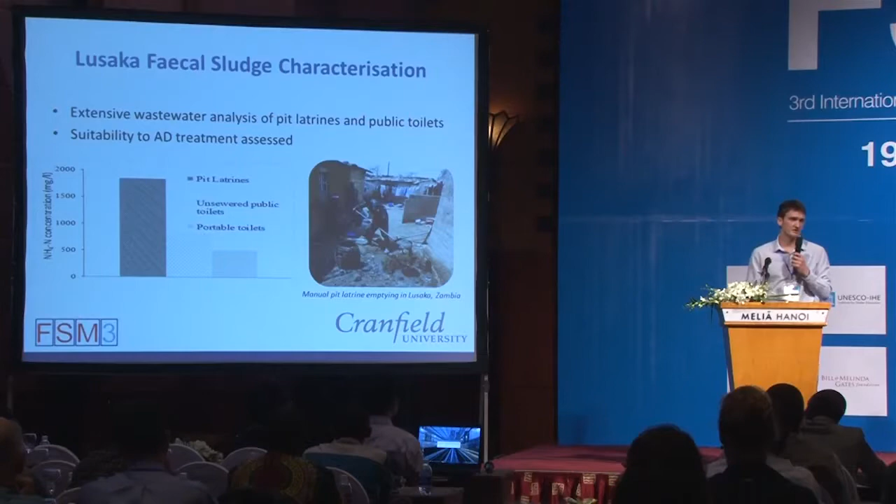This developed with the aim of coming up with a simple way of recovering ammonia and nitrogen from anaerobic digestion effluent, and in turn creating high-value products that we can use.

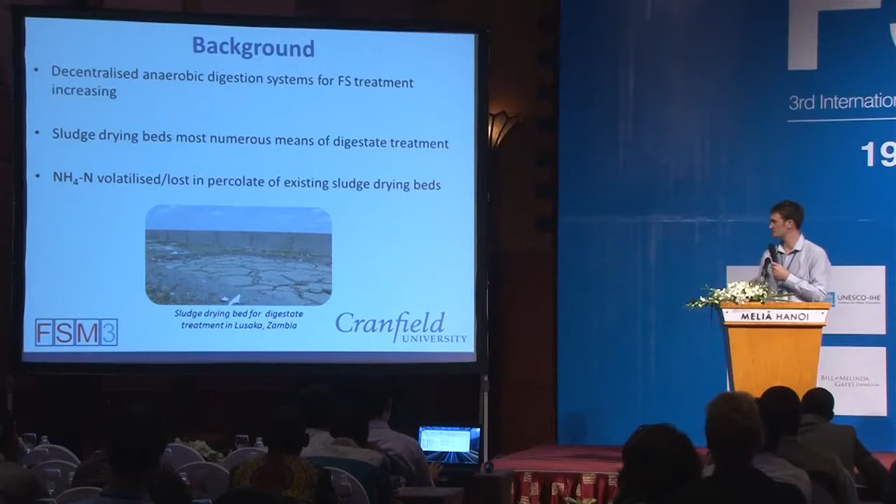Much of the nitrogen is volatilized and lost to the atmosphere, or lost in the percolate below the sludge drying bed. So the end product means the sludge in the drying bed is actually quite low in nitrogen. If we're going to use it as a soil amendment, it doesn't have much nitrogen there, and it's really just an organic material.

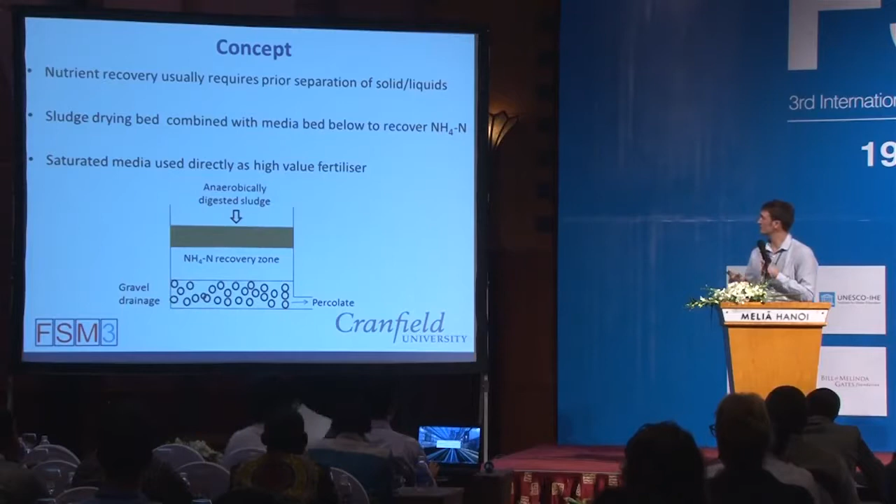This led to the concept that we could combine sludge drying beds with ammonia recovery for real benefit. Most ammonia recovery technologies generally require prior solid-liquid separation to get ammonia recovery. But what we thought is, if we could use a media layer beneath the drying bed surface to absorb and capture the ammonia, then we could use this media in fertilizer. That's the concept, and we set out to find a media that could fit this purpose.

We first looked at clinoptilolite, which is a naturally occurring zeolite. It's got a high affinity for the ammonium ion, which is perfect, but it's also got great potential as a slow-release fertilizer.

The second medium we looked at was biochar. Again, it's fairly available in these sorts of countries, perhaps a bit expensive, but it's also got very high porosity and a large surface area on the particles, quite similar to activated carbon.

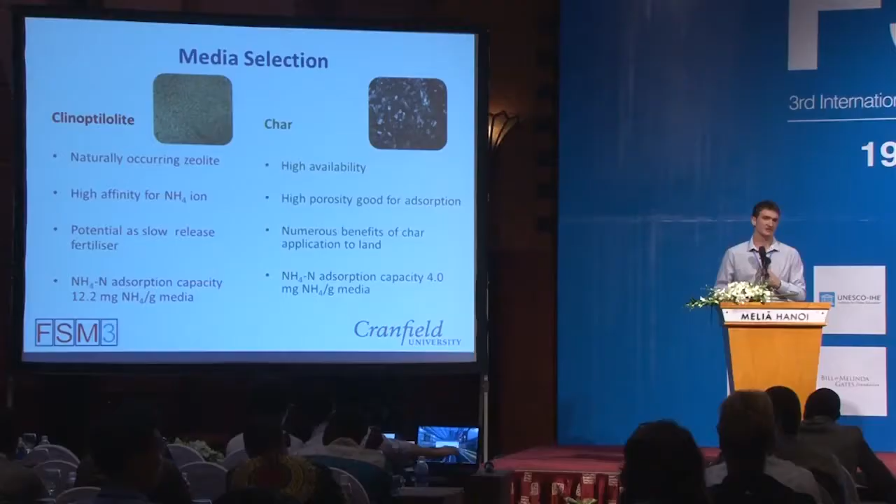Both of these are great for applying directly to land, so we can use the saturated product directly as fertilizer. As you can see, we did the batch absorption isotherm test, and we found that zeolite is the clear winner in terms of its capacity for absorbing ammonia at these ammonia concentrations.

I'm just going to focus now on zeolite. Zeolite has been used as an ion exchange media frequently in the literature for conventional sewage works in Europe, for example. However, generally it's used for treating final effluent and as a polishing stage, not for treating waste with such high concentrations of ammonia as we see in this effluent.

Not only this, but there are high concentrations of competing cations in the solution, which interfere with the ion exchange process, and this could cause a reduction of capacity by 25%. But the high organic load seen in anaerobic effluent actually increased the affinity for ammonia absorption by 14%. So that was quite interesting.

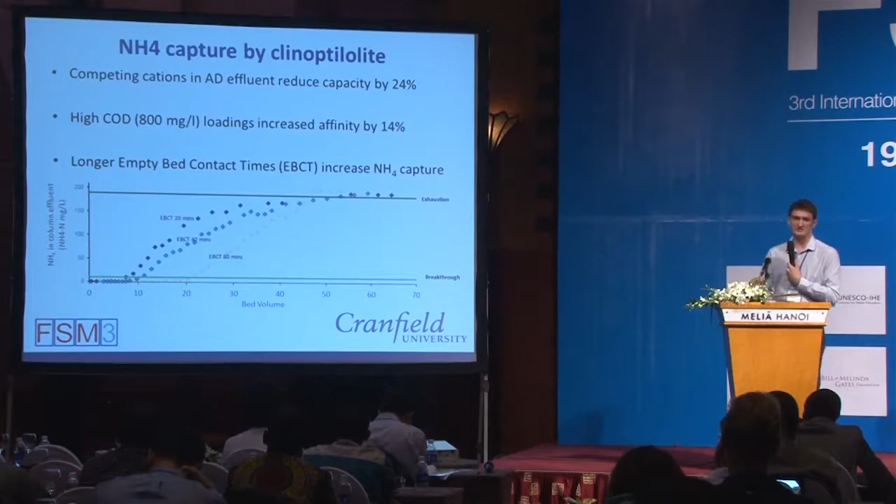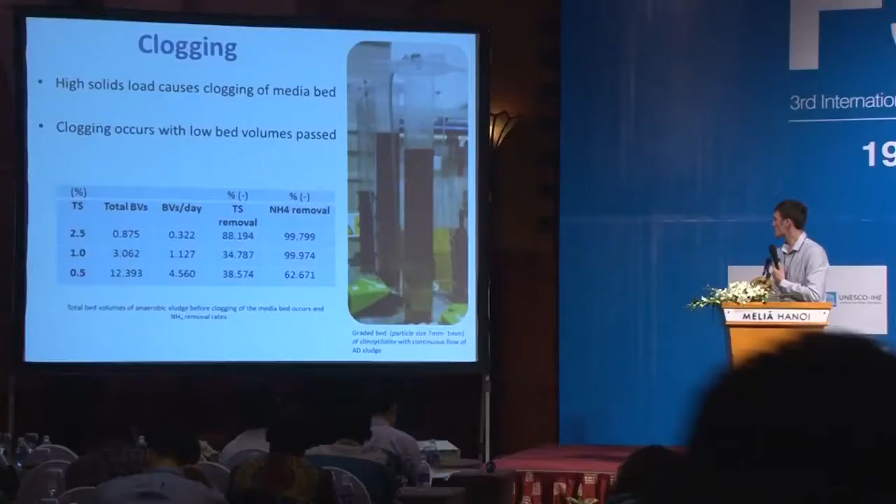However, that was with anaerobic liquor without the solids. We introduced the solids, and you get what you'd expect. And this is largely in terms of clogging.

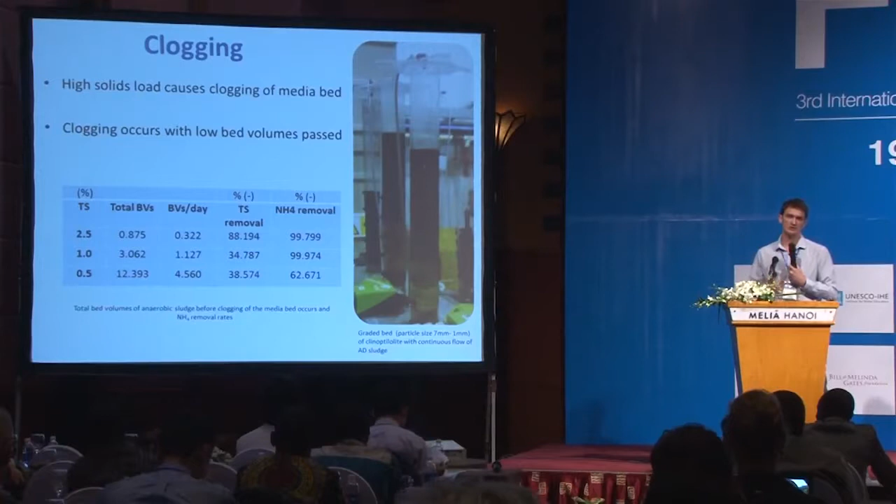We set up some large scale columns with trickling anaerobic effluent through the columns. But what we're seeing is clogging of the media bed at the surface, resulting in quite low volumes of sludge percolating through the media.

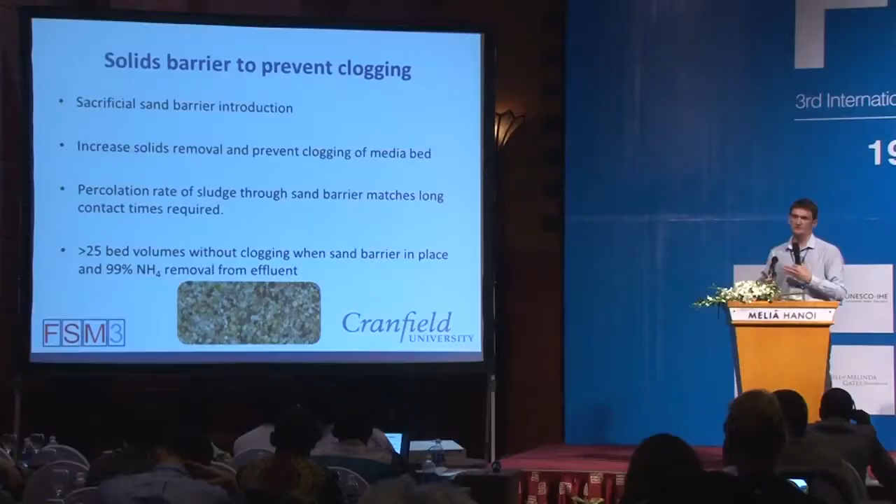But we had a solution for this in terms of introducing a sand barrier at the top. The idea of this sand barrier is to be sacrificial, so we can remove it as it gets clogged and preserve the media bed below. This works well, as most of the clogging was occurring at the top of the media bed. So the sand barrier captures most of the solids here, we scrape it off, but we're still getting very consistent results.

So just to conclude, the proposal for the new design is a system that is quite flexible. It can be batch fed, or continuously fed in a gradual trickle. What we're saying is that you just need to load it until the sand reaches the critical point of solid loading and no longer allows any percolation through the bed.

So this is quite flexible, and it also adapts to your area. All you've got to do is measure the rate of the critical point where the sand no longer percolates beneath the bed. And then after this, you simply scrape off the sludge thick cake at the top, and then reapply, and keep going in cycles like this.

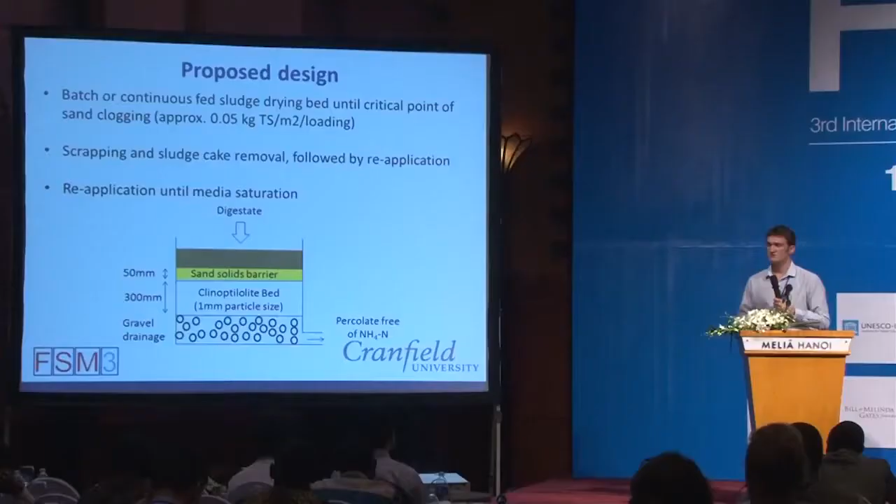And it allows a much higher rate system than conventional drying beds, and can be fitted into different areas. It's also great because it provides good flexibility in terms of making the bed deeper depending on the service times you want, so you can have this system run for years and years without changing the media bed. It's all about changing and adapting however you want it to suit the setup.

So just to conclude finally, this has got great potential for this sort of modified dry bed concept. It's got flexibility in terms of operations and maintenance, and provides great benefits in terms of protection of the environment, making it well suited for dry beds in general, just to start with.

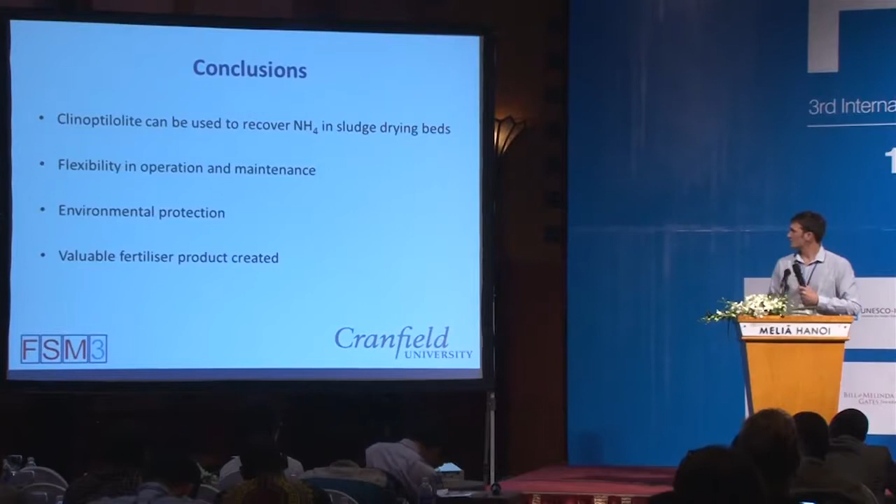And also, at the end, you're creating a product that is highly saturated with ammonia, a really high value fertilizer that can potentially be used. So thank you for your time, and I welcome any questions or comments.

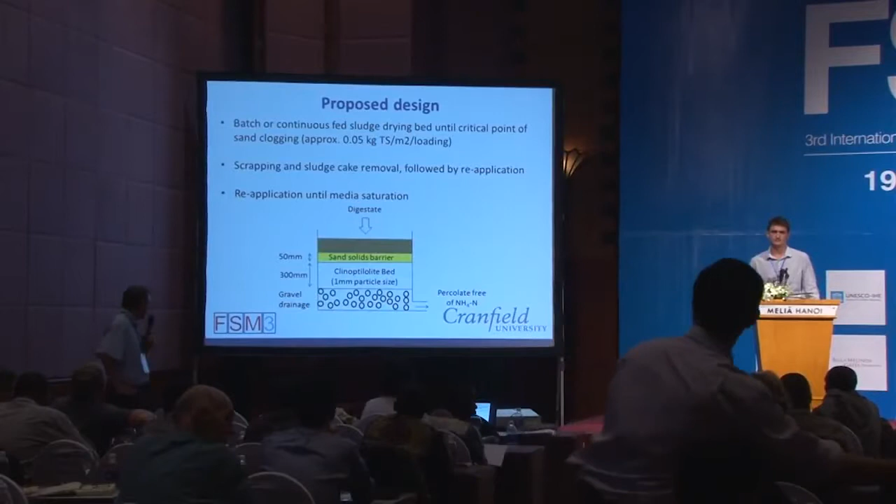Thank you. Oliver Wright from Mantu. The binding of the nitrogen into the media - have you done any testing on how well it's absorbed and bound onto the media? And to dilute it or leach it out, what would you use? I'm not a chemical engineer, but how would you release it from that? If it's very well bound, how's it going to work as a fertilizer or soil conditioner or something like that?

Yeah, that's a great question. You can regenerate the media and strip the ammonia off it just by sodium solution, but this is not really ideal, because to do that you've got to have a lot of chemicals and it just adds another process. In terms of how well it naturally releases the ammonia, that's a great question, and I think it requires quite long-term pot trials and studies to see whether that factor is the case, and that's definitely future work that would be needed.

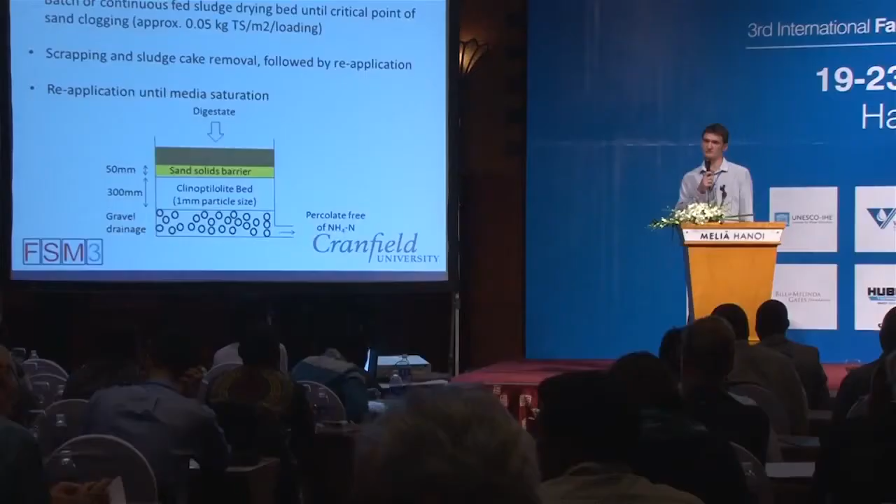There are better medias that we could use if we're thinking of regeneration, but clinoptilolite has a lot of advantages in terms of agricultural benefits as it is, so that's why it's selected as one of the medias. One of the reasons for not selecting the char to move forward was the char's got quite a good ability to absorb, but it tends to hold on to much of what it absorbs and doesn't actually release that well.

So that was another one of the big benefits of moving forward with clinoptilolite instead of the char. Sorry, so the second part actually was, because you were talking about a lifetime of the bed, maybe a year or 2 years before it would be exhausted, so that must mean quite a low application rate per volume of bed. Maybe something you can talk about afterwards, of how you get contact between the bed and the fluid at such a low rate, and the shape of the medium.

Yeah, I agree, I think there's a lot of adaptability in terms of the hydraulic rate, depending on your land availability. You can run it as quite an intense system on a small plot of land, or you could run it as quite a large, less intensive system. It would all be about sizing the rate and working on that.

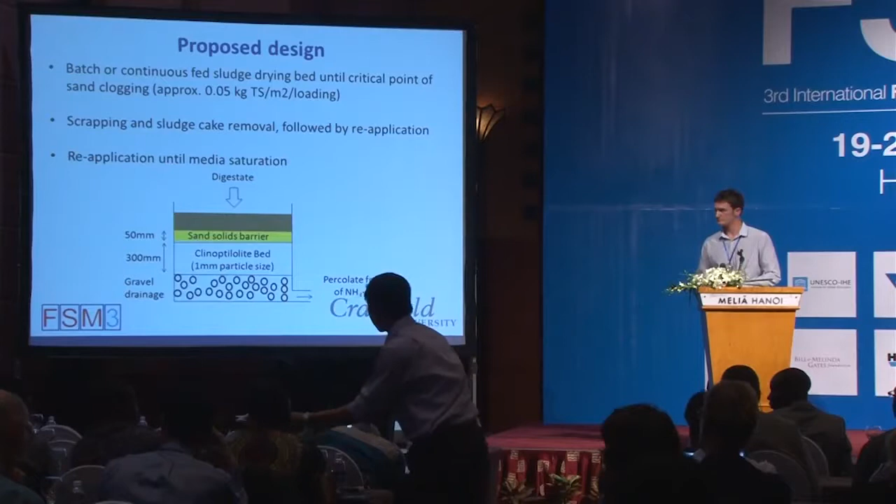Okay, my question is still on the ion exchange. Potassium ion and ammonium ion have almost similar ion sizes, and it was almost the same affinity for potassium ion. So did you do any quantification of potassium in your sludge?

Yeah, so we have been monitoring potassium. Were you asking about potassium in the incoming sludge? Yes, because it is almost similar, I mean, similar size with ammonium ion, and that was an almost similar affinity for potassium ion as well, so that ion exchange reaction is very important for you to consider.

Yeah, I touched upon some of the impacts of competing cations on the reduction in capacity for ammonia. Potassium is important, and the zeolite will capture potassium for the reason you say. We've done some work on the order in which the cations bind to the zeolite. Potassium generally outcompetes ammonia, so it will generally capture more potassium than ammonia, but that's not a bad thing in our eyes, since we're generally not seeing that high concentrations of potassium in anaerobic digestion effluents. There it is there, but we want to capture that as well, so I think it all adds to the benefit.

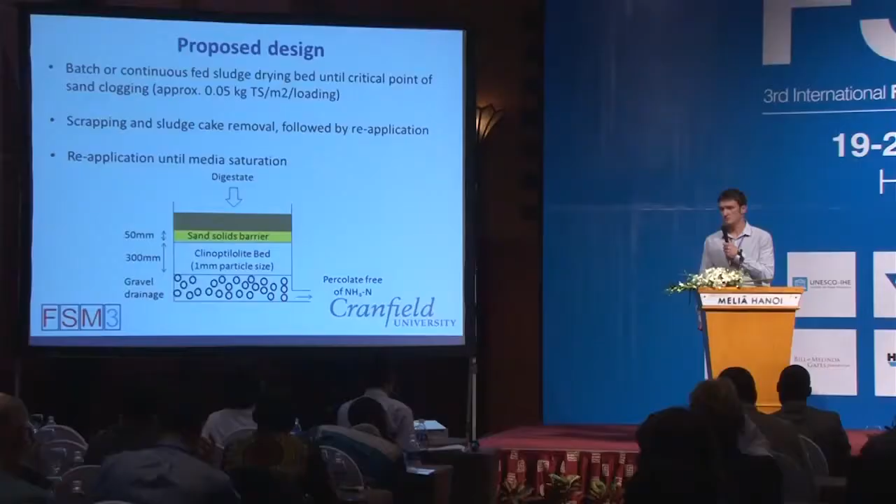I'm sure many of you, like me, have learned a new word today—clinoptilolite. Never heard that before. I'd be interested to know how available it is, and the cost and stuff like that. We can talk about that afterwards.

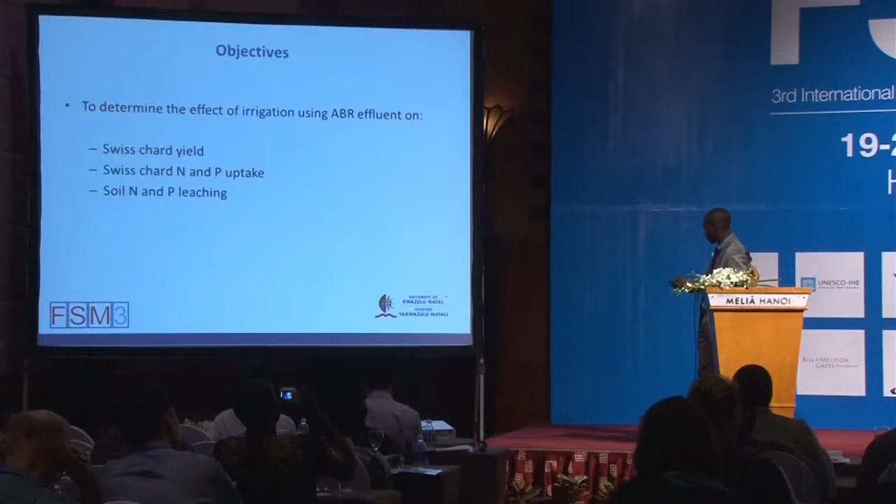Thank you very much. Good morning, ladies and gentlemen. My name is William Musazura from the University of KwaZulu-Natal. My major focus of study is trying to incorporate an agricultural component as part of the sanitation system. My research was entitled 'The Effect of Irrigation with Anaerobic Effluent on Swiss Chard Yield, Nutrient Uptake, and Leaching.'

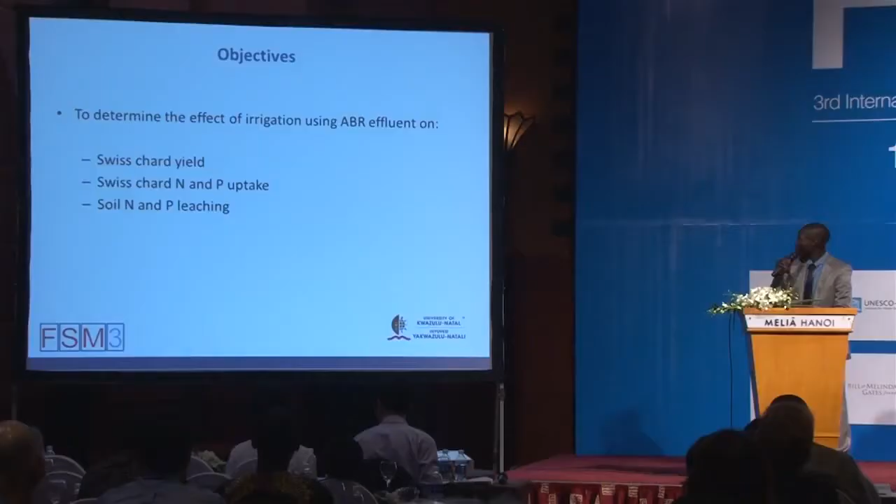Demographic studies have been characterized with high rates of urbanization, with about 70% of the population living in towns and cities. This figure is expected to rise by 2030 and beyond, according to the studies.

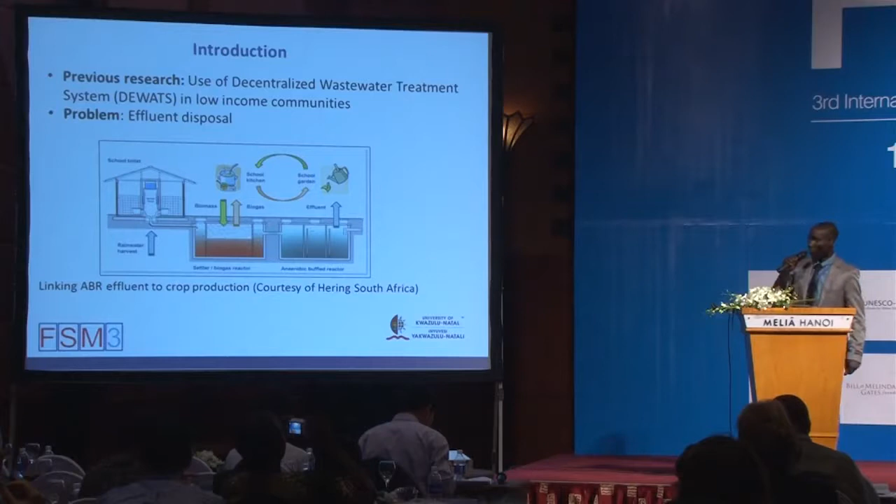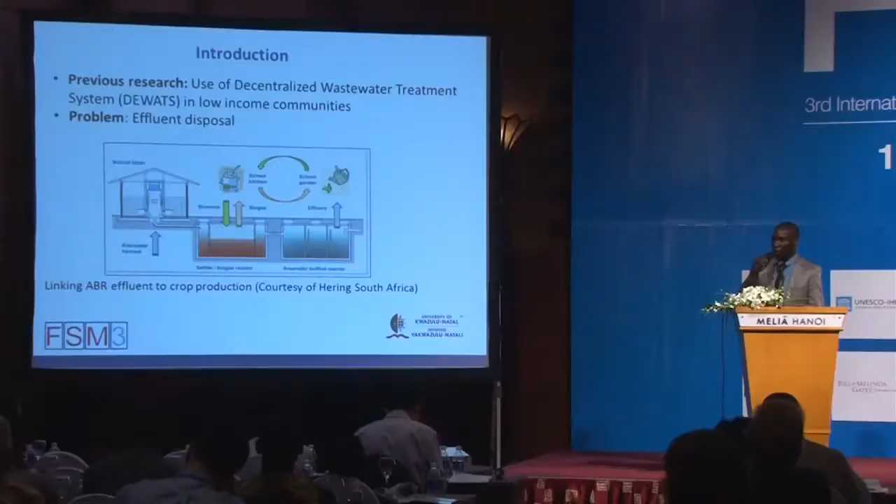This is also imposing pressure on local municipalities as they try to link sanitation systems to the ever-increasing informal settlements. However, decentralized wastewater treatment systems have been proposed as one of the best alternatives that can provide on-site sanitation to low-income communities in most developing countries.

So the problem is now first with the disposal of effluent. How can we dispose of the effluent? Should we dispose it into water bodies, considering that it contains high nutrients such as nitrogen and phosphorus? Disposing into water bodies can lead to eutrophication, so can we use it in agriculture instead? Its use in agriculture must also be sustainable. Won't it lead to other problems such as nutrient leaching?

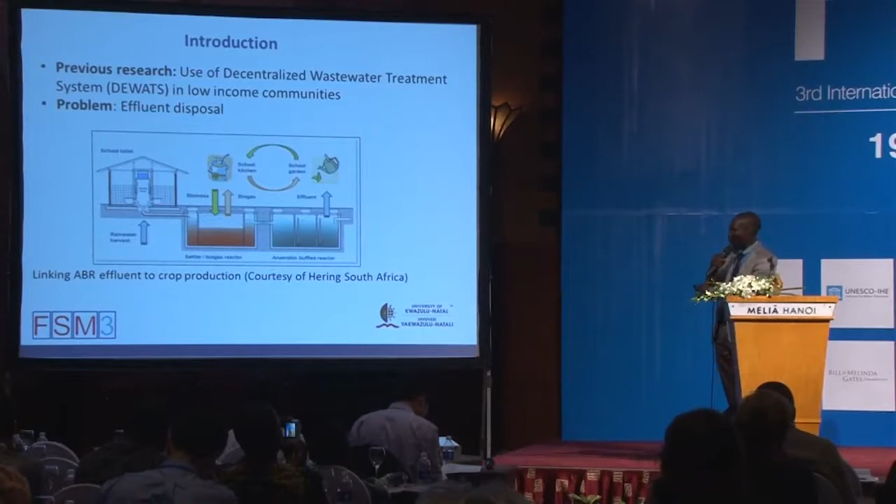That's where I come on board. My major objective of the study was to investigate the effect of the anaerobic baffled reactor effluent on Swiss chard yield, nitrogen and phosphorus uptake, as well as soil nitrogen and phosphorus leaching.

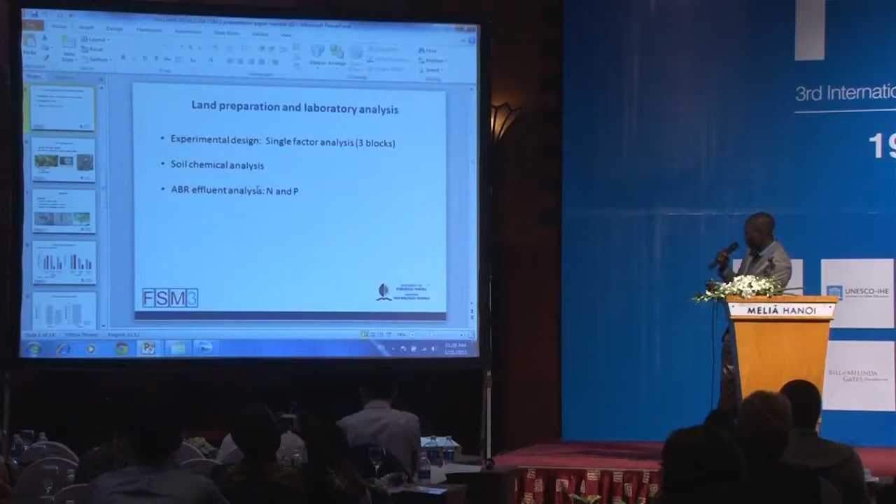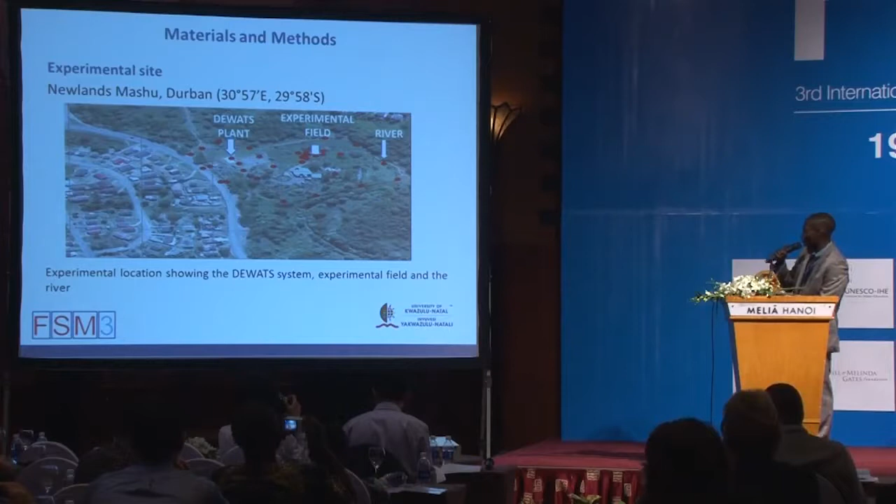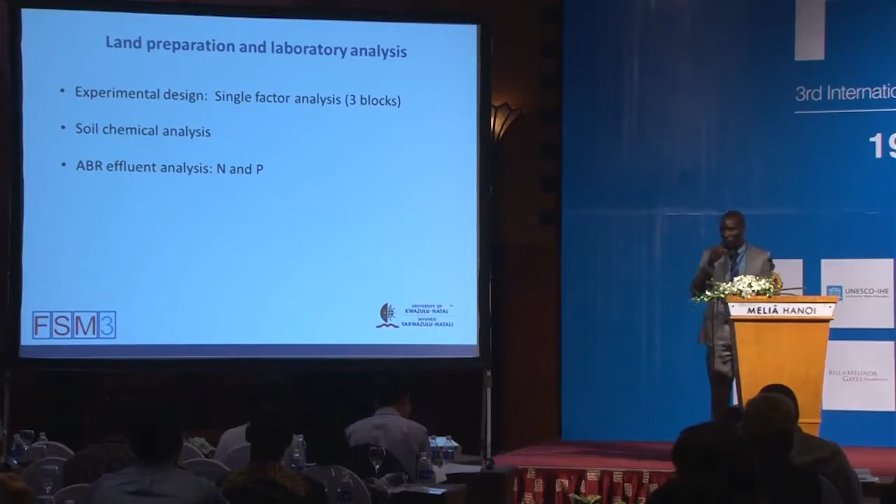My experiment was conducted as a single factor analysis with 3 blocks. Soil and chemical analysis were done before and after each experimental period. The ABR effluent which I used for my experiments was analyzed for physical and chemical properties, especially nitrogen and phosphorus.

My experimental trials were the ABR effluent irrigation without fertilizer, and tap water irrigation. My experimental treatments included ABR irrigation, tap water irrigation with fertilizer, and one treatment was left under rainfed conditions.

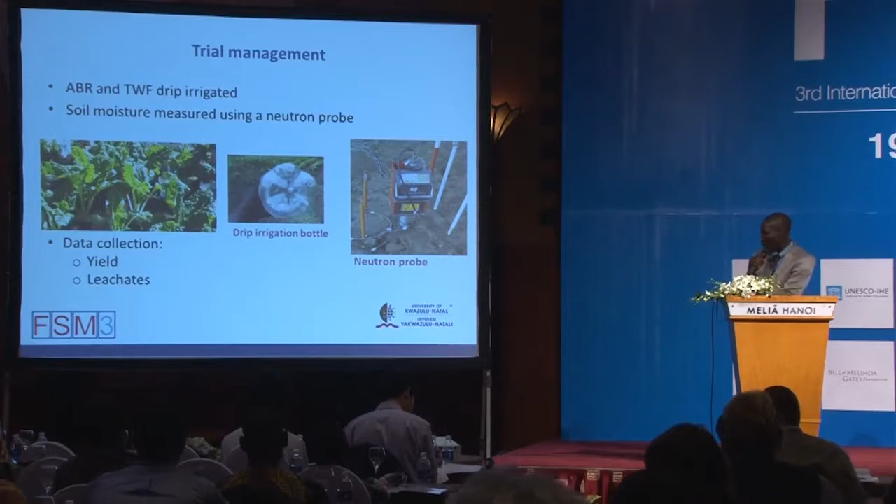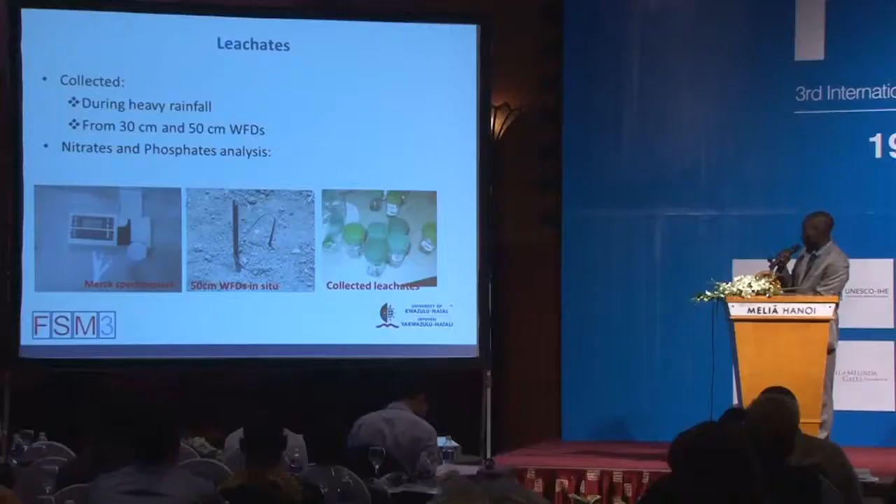The results which I obtained showed that irrigation with ABR effluent was comparable to other agricultural practices, such as tap water irrigation with fertilizer.

During the first season in summer 2012, there was no significant difference in fresh yield as well as dry yield. However, significant differences were noticed during the winter season, when the ABR effluent irrigation had the highest fresh yield compared to tap water and fertilizer, as well as under rainfed conditions.

These results were also consistent, although tap water irrigation was not significantly different from irrigation with ABR effluent in terms of dry mass. This could probably be due to seasonal differences.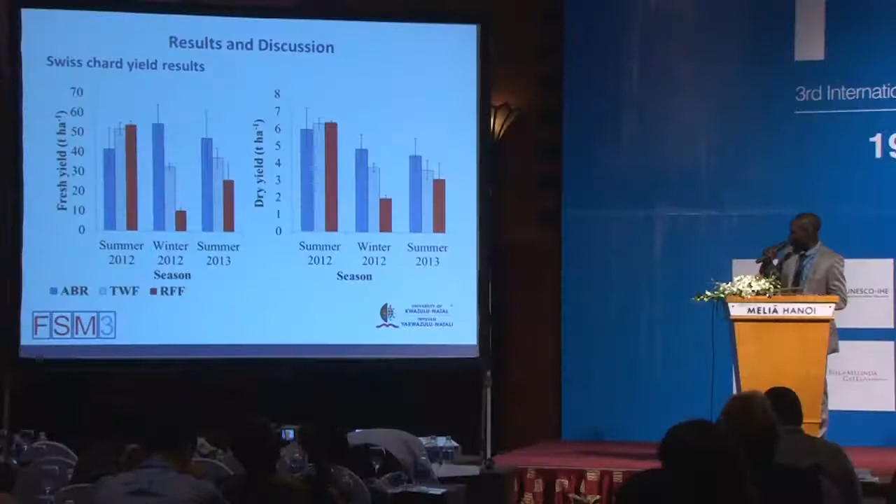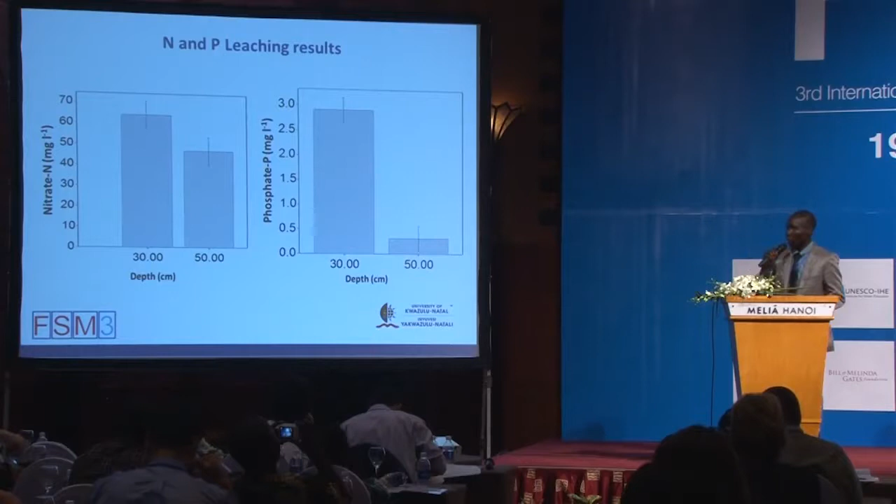These were my N and P leaching results. All the results from the leachates collected showed that most of the nitrates and phosphates were concentrated within the 30 centimeter depth for all treatments, with few obtained from the 50 centimeter depth, indicating that there was no leaching of N and P.

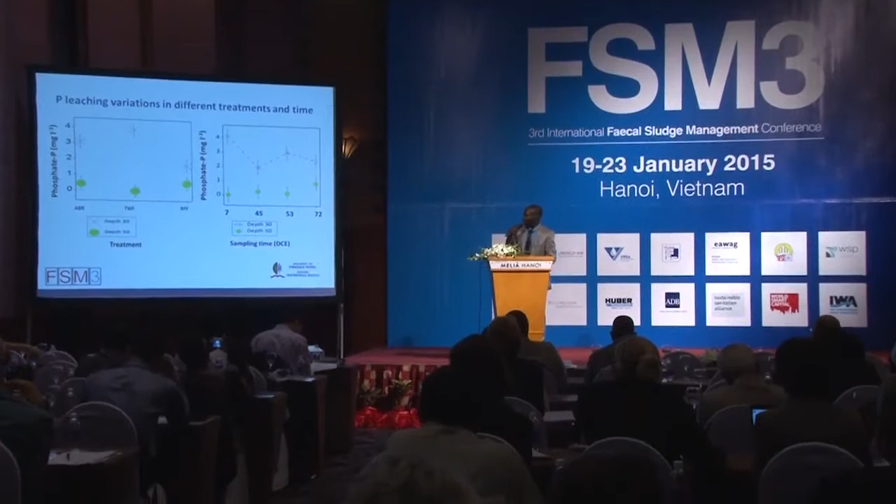The variations in the concentration of phosphorus from the different depths and treatments were not significantly different across all treatments, an indication that the leaching of phosphorus from irrigation with ABR effluent is comparable to other agricultural practices such as irrigation with tap water and fertilizer, as well as under rainfed conditions.

Also, across the seasons, the phosphate concentration was concentrated within the 30 centimeter depth as compared to the 50 centimeter depth, an indication that there was negligible movement of phosphate between the depths. This is also expected, considering that phosphorus is very immobile, and the soil type would have a contribution since the experiment was conducted in a clay soil type.

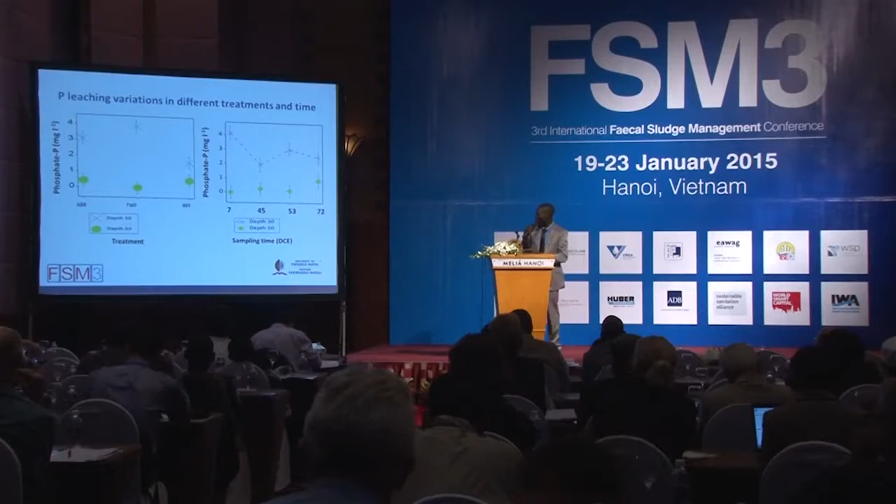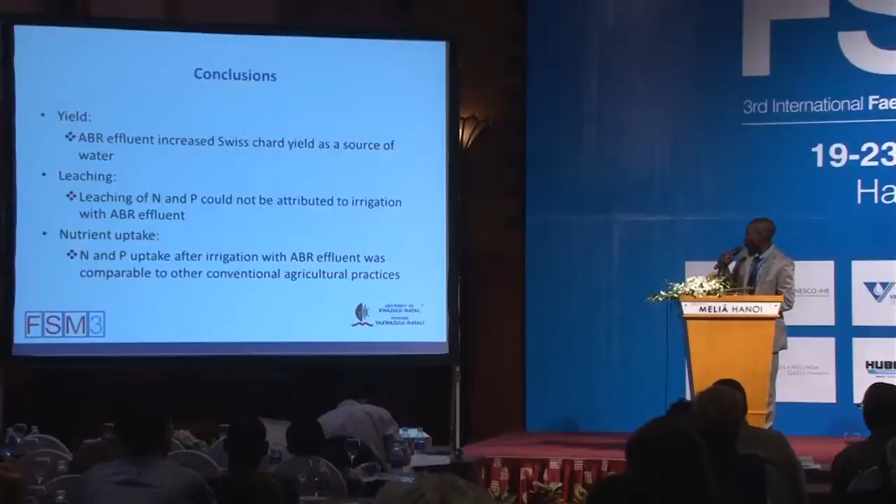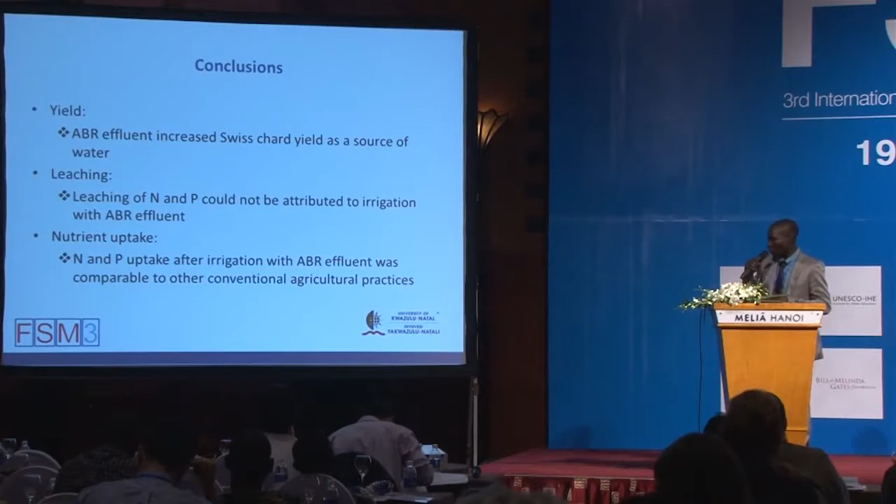So for my conclusion, I can conclude that effluent increased Swiss chard yield as a source of water, especially during the winter season, and the leaching of N and P could not be attributed to irrigation with ABR effluent, since the results obtained showed that the movement was comparable with other treatments. Also, for nutrient uptake, there was no significant difference in N and P uptake across all treatments, indicating that ABR effluent irrigation can be compared to other conventional agricultural practices.

However, these results were done over a small period of time, and they are inconclusive. So we are still working on finding out how to deal with the excess effluent, especially in summer when there is high rainfall, and also looking at the long-term impacts. We might have observed negligible leaching of nutrients over a small period of time, so we are doing some modeling studies.

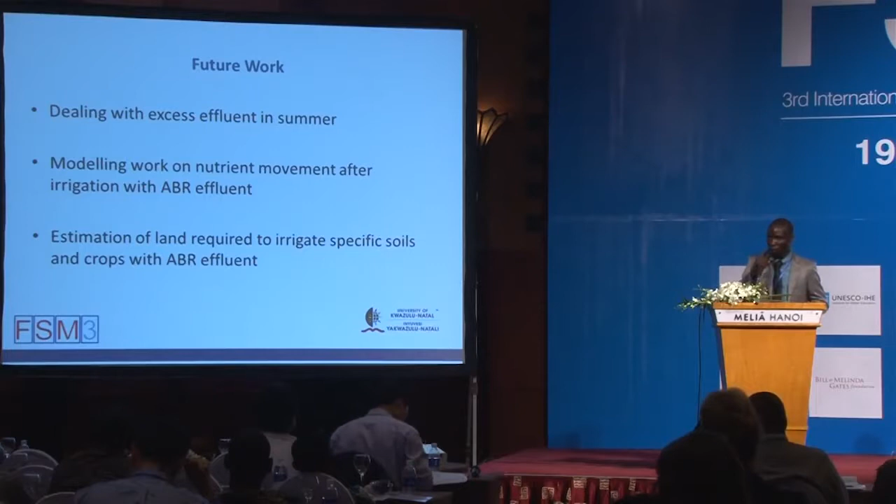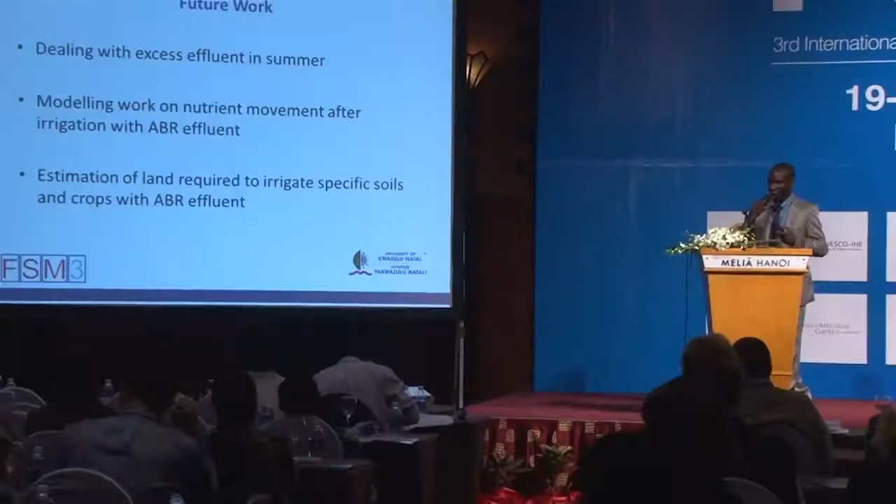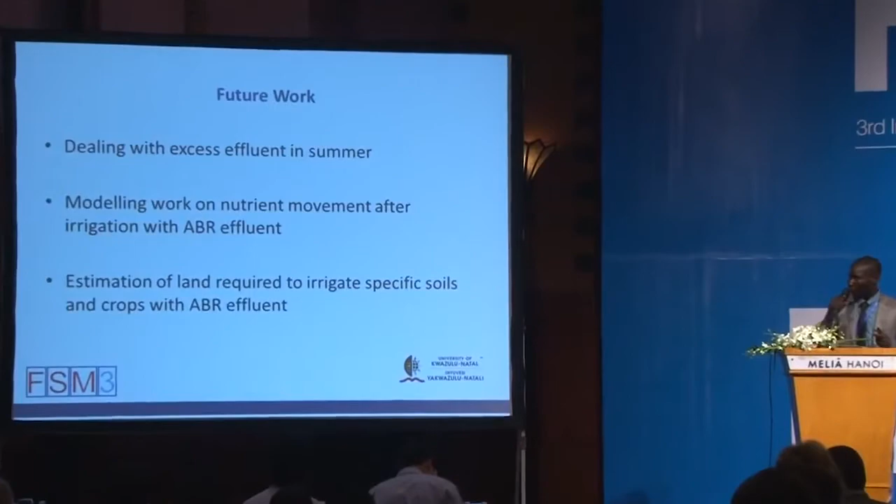We are investigating the long-term effects of irrigation with ABR effluent on N and P leaching. We also need to look at other factors, such as the type of land required to irrigate specific crops, and the feasibility in terms of land availability, and how this will form part of our modeling studies.

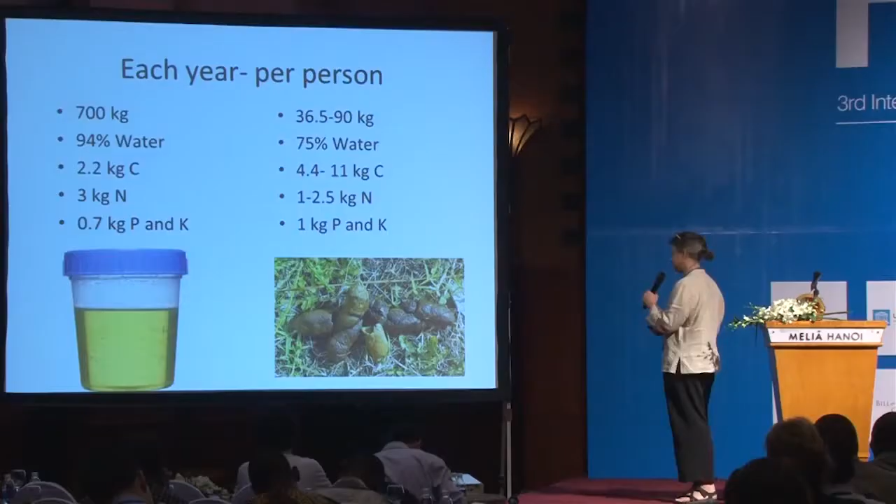So you get your nutrients, but you also get your carbon. You have to think about how to take this mix of water, carbon, and nutrients and get the most value out of it. Now, realize that the primary mission of this conference and of what we do is to protect public health.

I'm not saying that raw sludge is fabulous and should be land applied. There's a reason we're here talking about treatment.

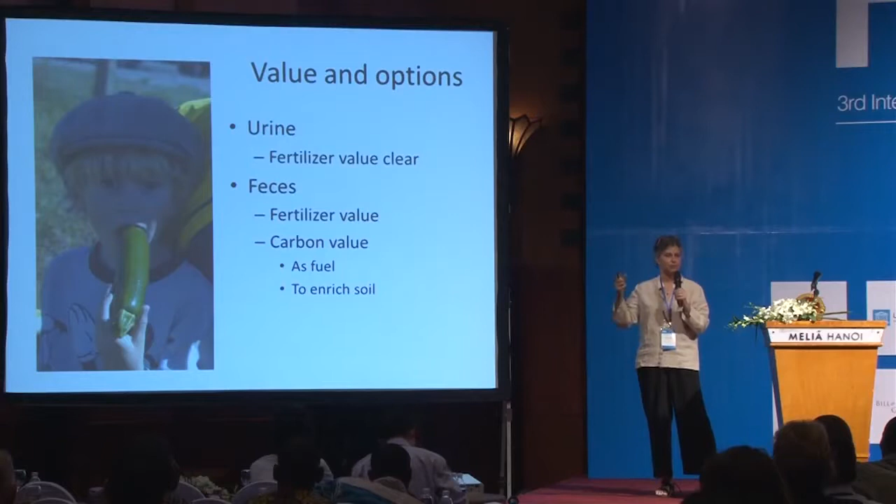So what is our value? Urine is mostly liquid, so low in carbon, it's pretty clear the value is only in the nutrients. Feces are a different deal—you have fertilizer value, and it's not dissimilar.

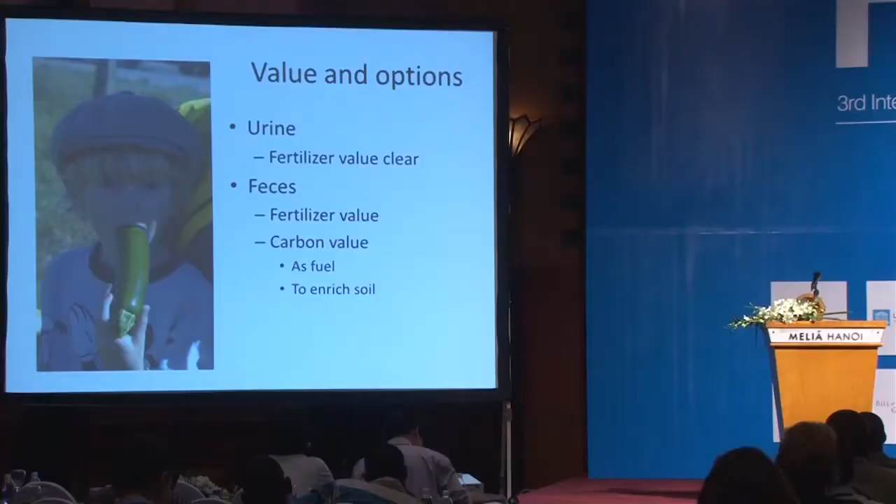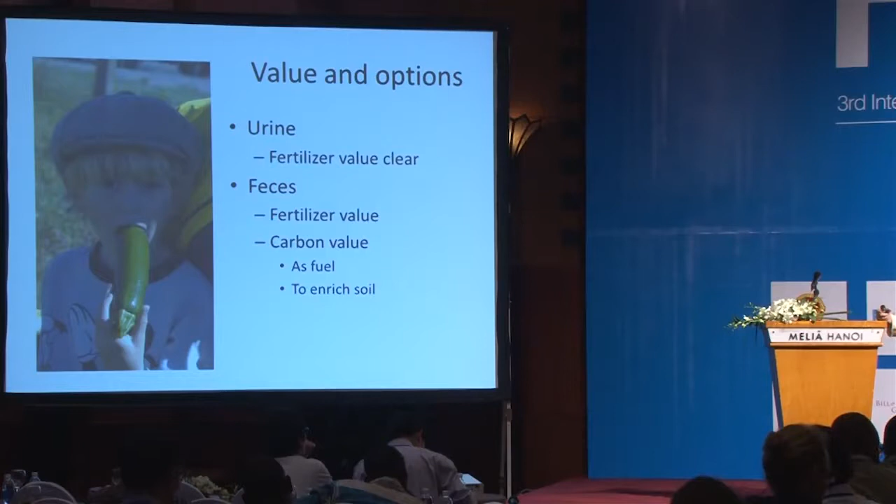Value for soil. I am a soil scientist with bells on, and this is the International Year of Soil. Soil is something we tend to neglect, but it has great value. When you start to quantify the value of soil—and people are starting to do this—there was a paper published that said 17% of New Zealand's gross domestic product was directly related to soil. Ecosystem services, most of which are directly related to soil, were valued at double the annual GDP. So when we talk about wastes and their use for soil, realize we're talking about big bucks here.

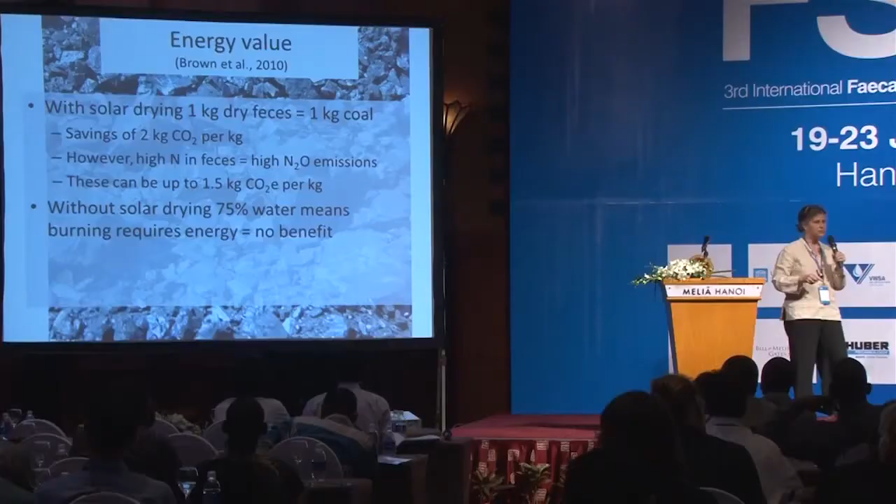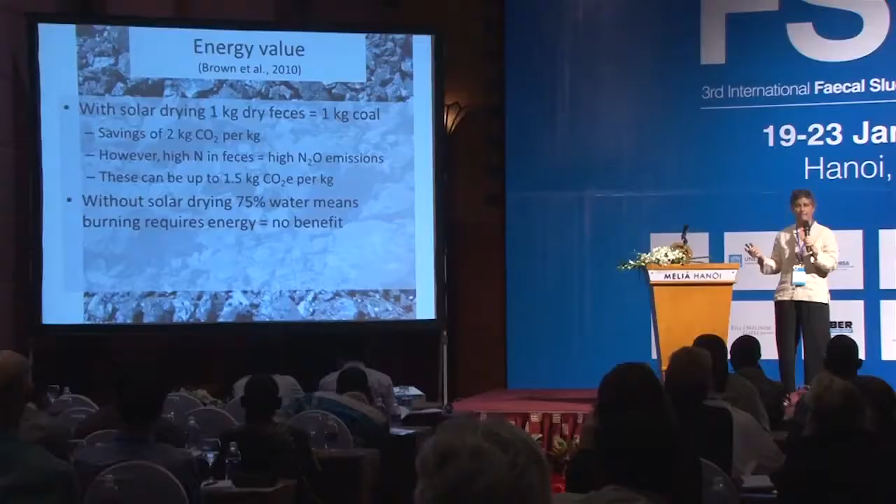Let's talk about energy value. Using energy from these materials is great—it kills pathogens, gets rid of the disposal problem, gets rid of the yuck factor. But if you do the balance, with solar drying, your dry material has about the same energy value as brown coal. That's not bad. In places where you need energy, this is often looked upon as a great answer.

Realize, however, that using this dry fecal material as an energy source—it's also very rich in nitrogen. When you burn this material, you can emit very high quantities of that nitrogen as nitrous oxide, and that, in a greenhouse gas balance, basically takes away a lot of the energy benefits. We've seen this: you need to burn this material at very high temperatures to avoid N2O emissions, and then you get NOx emissions, which are very bad pollutants.

Without solar drying, you're talking about material that's 75% water. I don't know how ubiquitous Boy Scouts are across the globe, but has anyone tried to start a fire with wet wood? It doesn't work very well. If you look at the energy balance, you need to get to about 40% solids to burn without excess energy addition. So anytime you talk about drying that isn't solar drying, you're not gaining energy—you're using energy in the process.

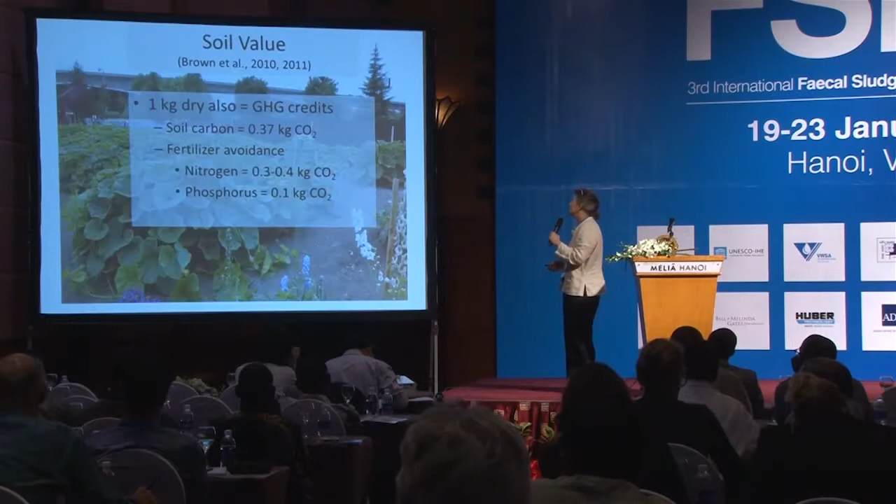Now you know where I stand. Soil value: when you talk about these materials as a soil amendment from a greenhouse gas perspective—and for me this is a really critical perspective—that carbon with fuel value is also the Viagra for soils. It's the part of soil that gives it its tilth, its fertility, its productivity. By adding carbon back to the soil, since most of our soils are very depleted in carbon, putting some of that carbon back gives you greenhouse gas credits plus a whole lot of additional benefits.

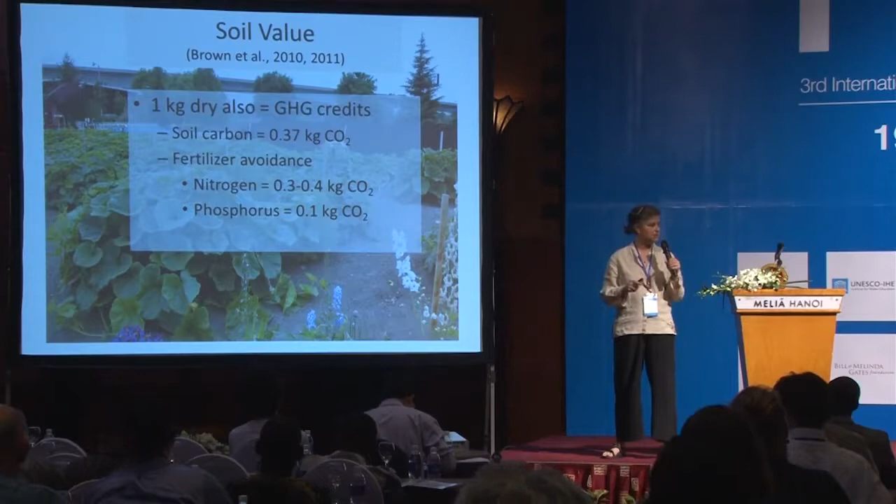You also get credits for not using synthetic fertilizer. Each kilogram of nitrogen applied as urea from a synthetic fertilizer plant costs you 4 kilograms of CO2. For phosphorus, it's about 2 kilograms of CO2 per kilogram of phosphorus. If you add those numbers together, you can see the greenhouse gas balance for land application is superior to what you get from combustion.

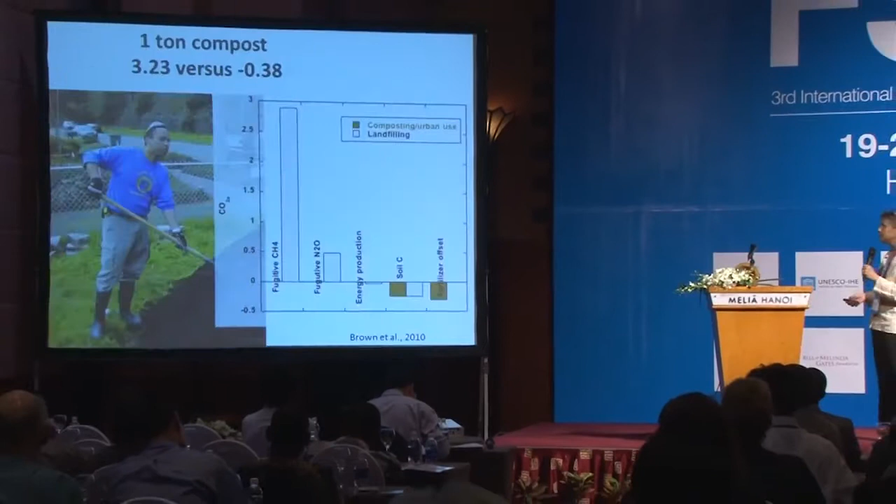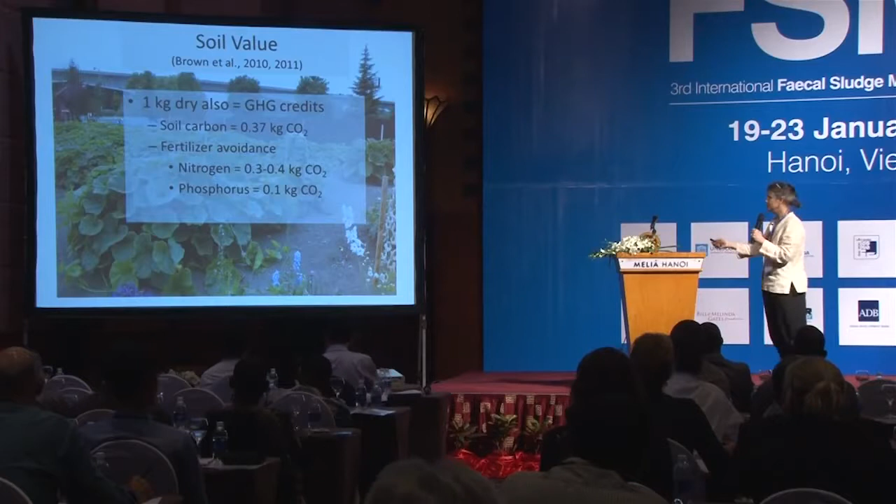Plus you get benefits—here's another example, from a paper. I should point out this is the garden at one of our local wastewater treatment plants in Seattle. All my pictures are grown in poop. Here we have biosolids compost being applied to a community garden.

What would be the difference? Say you don't want to burn the stuff, and you want to protect public health by putting it in a landfill. This is now being done extensively in China, which is where night soil became famous. A high portion of biosolids in China are being landfilled, and here you get fugitive emissions of methane and nitrous oxide.

Look at that balance. Okay, help me here, which way do I go? This way. Here I go. The nitrogen, the methane, the N2O, here's what you get for energy. Here, clearly, you have a much better end use from a greenhouse gas perspective.

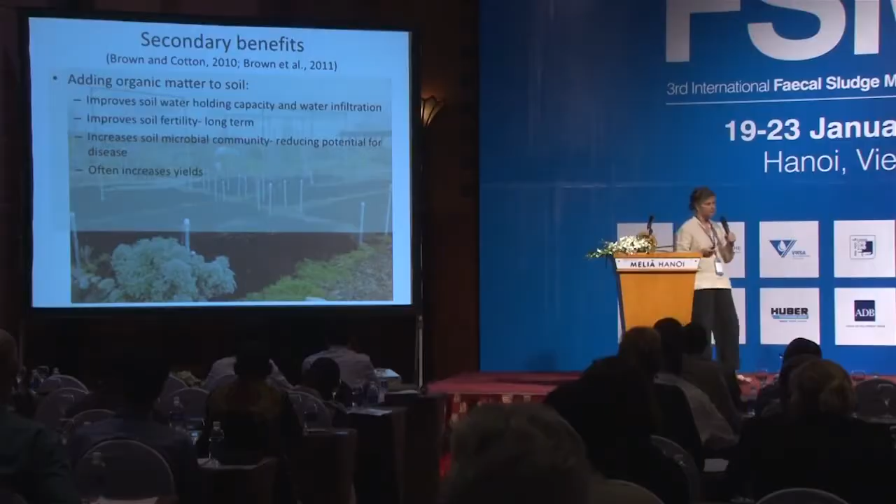The thing with using these materials for soils is you get a broad range of secondary benefits. For those looking forward to lunch, realize it's much cheaper and more effective to grow food in soil than in office buildings or hydroponic solutions. Soil is our living skin, soil is how we eat. When we look at long-term studies of land application of fecal material in the form of centralized biosolids, composts from food and yard waste, you get increases in soil water holding capacity, soil nutrients, soil microbial communities that make plants less prone to disease, and often increased yields.

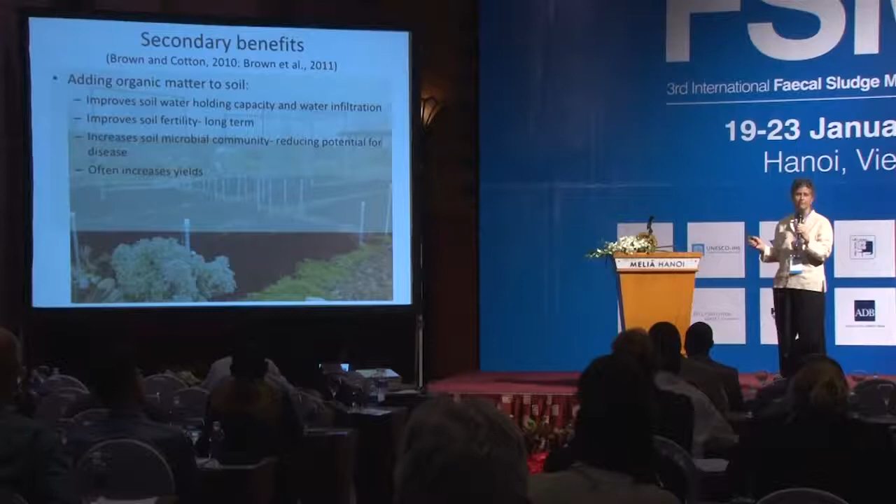This is a picture of a community garden plot. We're seeing more and more urban agriculture in the U.S. This is a 60-meter plot where they used compost and were able to produce enough food for a family of 4 for a year. Not the meat, though people do have chickens, not necessarily all the starchy materials, but $4,000 US in food in a 60 square meter plot.

So how do we best use these materials? What we're seeing, and what I love and am excited about in the States, is a resurgence of urban agriculture. People are starting to realize that growing their food is a wonderful thing. In the city of Tacoma, all the biosolids from the wastewater plant are used by local residents, and a substantial number is used in the community garden program. But realize that Tacoma, with everybody having a single family house with a yard and a lot of open space and big sprawling suburbs, is not what cities look like across the globe.

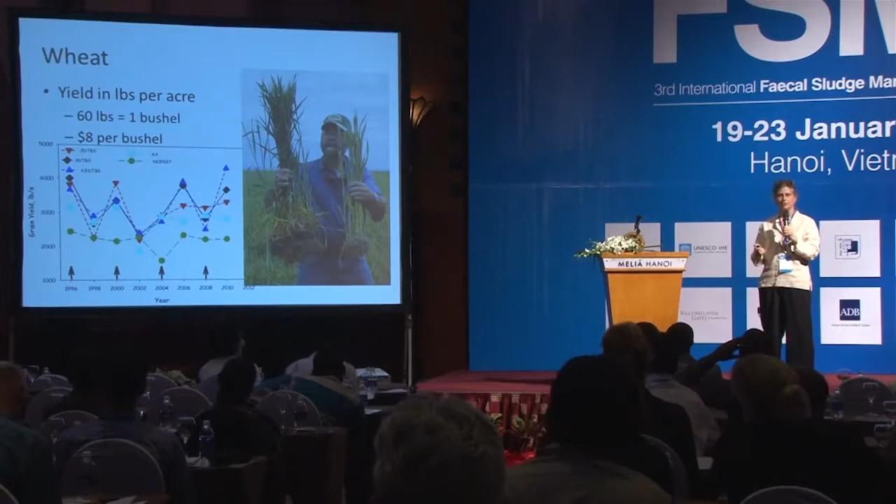Biosolids, I guess you can figure that out. But if you look at the last 3 yields here, you'll see this is the synthetic fertilizer. In 2 of the 3 yields, all of the treatments with biosolids had higher yields than the synthetic fertilizer. If you don't have access to fertilizer, the comparison is much more pronounced.

Now, what does that mean? It means increased food security, but look at the difference on an economic basis. Farmers here are seeing a revenue increase compared to synthetic fertilizer of $1,500 per hectare compared to $1,200. This could be very, very significant.

Okay, finally, another benefit — we talked about public health. In many urban areas, soils are highly contaminated. You've seen papers published about lead uptake in garden vegetables in Africa, concerns about soil contamination in China. Any place where leaded gas or leaded paints were used in urban areas, you have high levels of contamination. So what else do you get in terms of public health benefit besides food security?

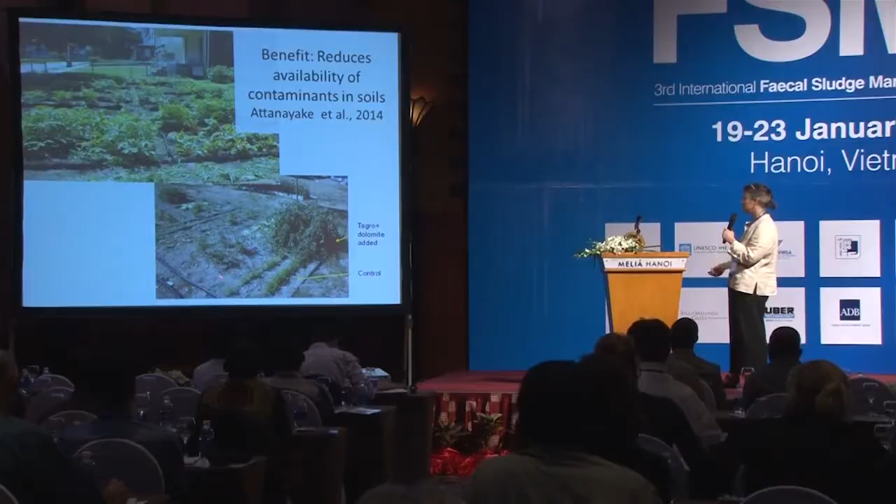When you use these materials on soils, you make the lead and other metals in the soil less available. There's research, and a number of papers published by this group, on urban contaminated soils, adding biosolids products here compared to a control. What they saw was not only did the plants take up less lead, but for children — who don't know they're not supposed to eat dirt — there was also a reduction in how much lead was absorbed into the child's system.

So you get a win in terms of food security, a win in terms of climate change, and a win in terms of public health protection from contaminants.